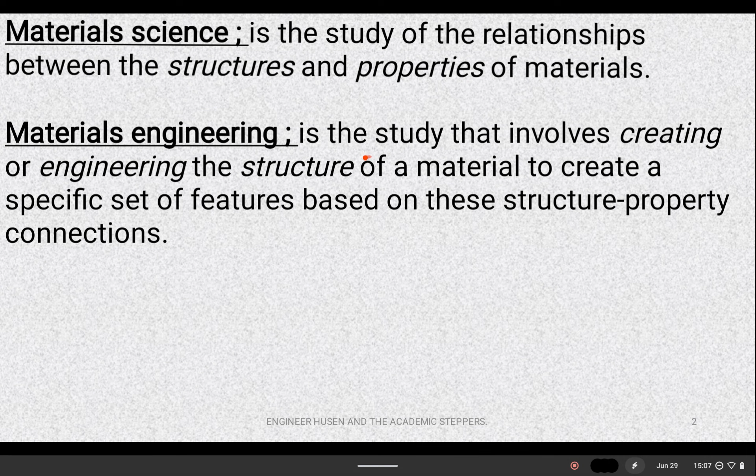Now we need to understand what material science is. Material science is simply the study of the relationship between the structures and properties of materials. With this in mind, we then have to understand what material engineering talks about. Material engineering is simply the study that involves creating or engineering the structure of a material to create a specific set of features that will be based on these structure-property connections that we have.

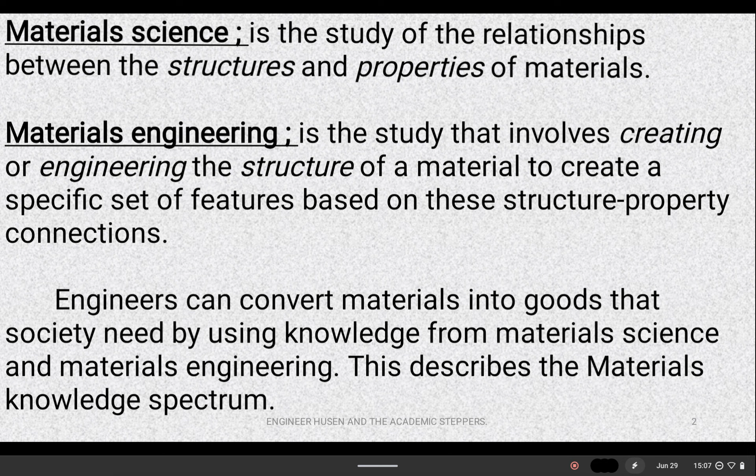So let's not forget that. As engineers, we can convert materials into goods that society needs by using the knowledge from material science and material engineering. This describes the material knowledge spectrum. In simplicity, all we're trying to say is that material science is simply the knowledge about the structure and property of a material.

Now that we acquire the knowledge, we're supposed to apply it in our day-to-day lives through engineering. That's where we have to create structures or materials that will meet the needs of society. Let's not forget that. So that is what material science and engineering looks at.

One thing you should know is this: when it comes to structures, a structure in materials is defined as the arrangement of the internal components of a material. So the way the internal components are arranged in a material is simply what is known as structures, and structures are of types. The first type is known as macroscopic structures, and these have structural features that can be seen with our naked eyes.

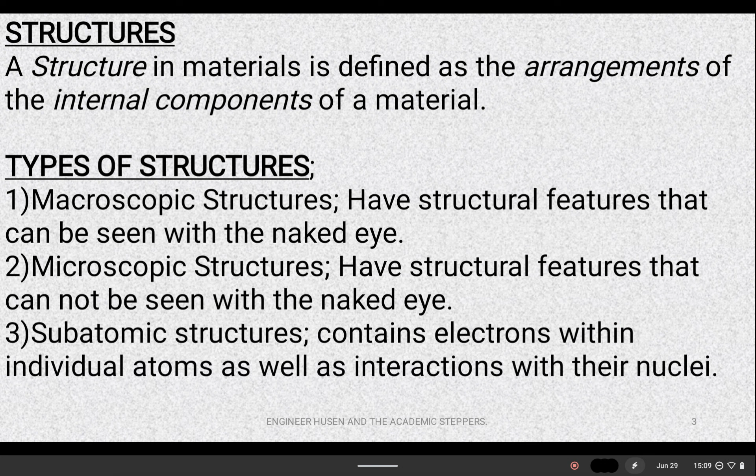Then after that, we also have what is known as microscopic structures - now, microscopic structures are these structural features that cannot be seen with our naked eyes. And the last type of structures that we have in material science is the subatomic structures. Subatomic structures contain electrons within individual atoms as well as interactions with their nuclei. So let's not forget that.

Now, with this said, we need to look at what property is. All materials are subjected to some external stimuli that leads them to react in some way, and this defines the material's property. For instance, a specimen can be subjected to some stresses that will make it deform, and you'll find that a polished metal surface will reflect light. So in terms of the nature and strength of the reaction to a particular imposed stimulus, a property is a material's behavior or response to that particular stimuli.

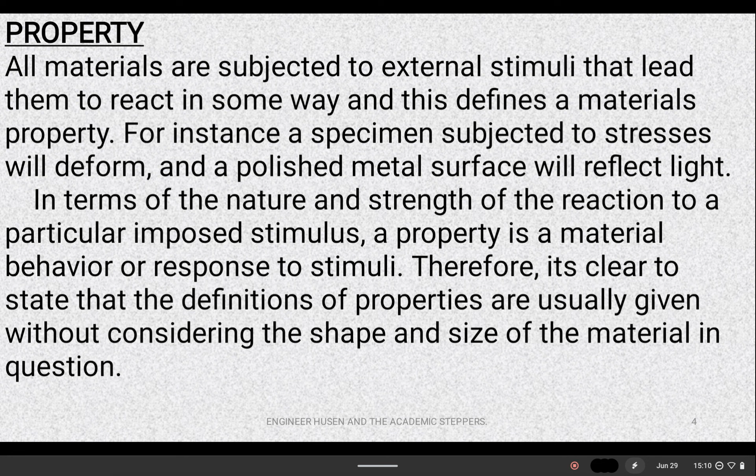Remember, stimuli are just factors that will cause a response. Therefore, it's clear for us to say that the definition of properties are usually given without considering the shape and size of the material in question. With what has been discussed, it's best to look at how we can group solid material properties. Solid materials will exhibit different types of properties, so let's try and group these.

The first property we can look at is the mechanical property. The mechanical property characterizes the solid material's ability to show what would happen if an applied load was subjected to it. So characteristics of a solid material that explain how it behaves when subjected to some external forces or stresses will describe the mechanical property that we're trying to highlight. Among the most frequent mechanical properties we have, we can look at the following.

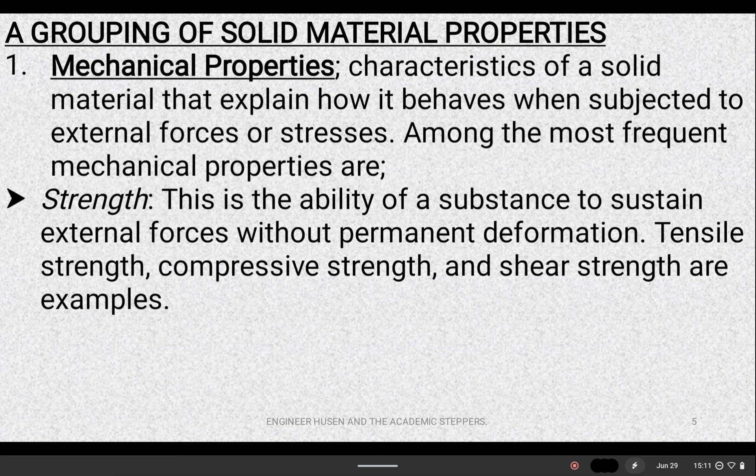The first one is strength. Strength is defined to be the ability of a substance to sustain external forces without permanent deformation. Tensile strength, compressive strength, and shear strength are examples.

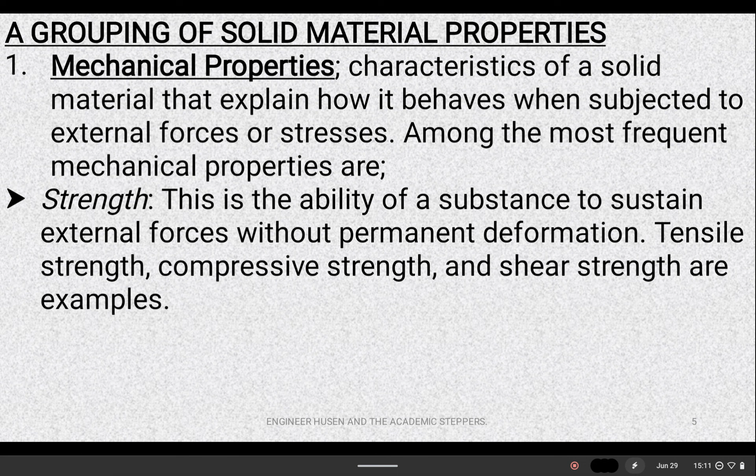Other than strength, we also have stiffness. Stiffness is the resistance of a material to deformation when subjected to an applied force. Let's not forget that. So the ability of a material to resist deformation is called stiffness, and in most cases you'd find this represented as K.

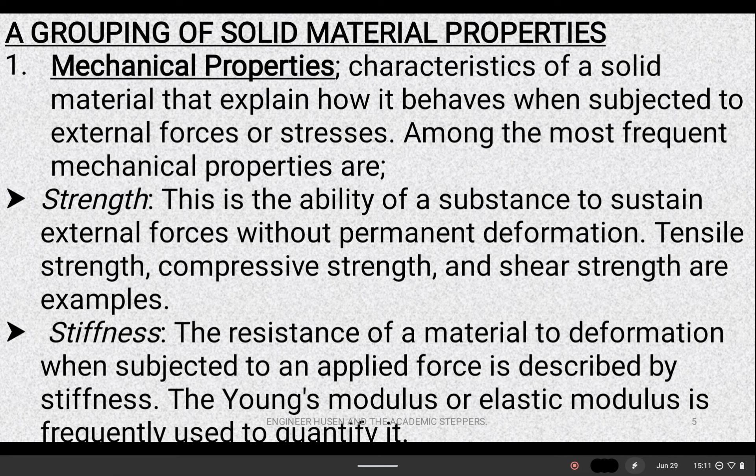The Young modulus or elastic modulus is frequently used to quantify stiffness. Other than stiffness, we also have hardness, which is a material's ability to withstand surface indentation or penetration. It indicates how resistant a material is to wear or scratches. If I try to scratch a material, is it going to be scratched due to the applied force, or not? The measure of resistance to wear or scratching is what is known as hardness.

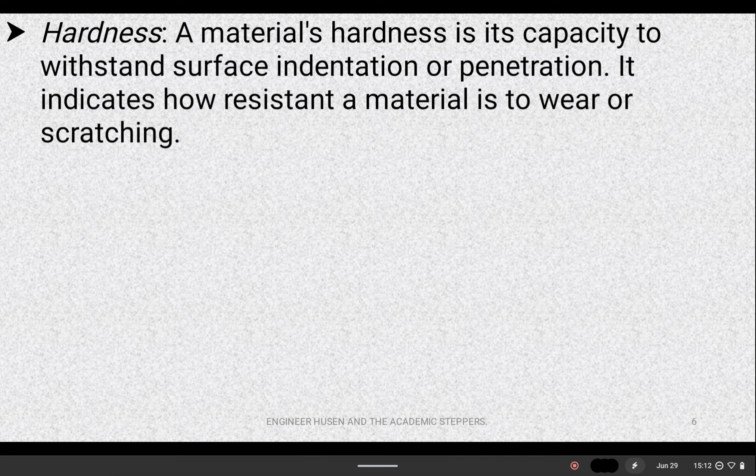Other than hardness, we also have ductility, which is simply the ability of a material to deform under tensile stress without fracture. It describes how far a material may be stretched or pulled into a wire-like shape. That's why when using the term ductility, you're looking at how a material can be drawn into something that looks like a fine wire.

We also have brittleness. All these are mechanical properties. Brittleness is just the exact opposite of ductility. When stressed, brittle materials tend to fracture. Fracture simply means to break without significant deformation. So brittleness describes the ability of a material, or the measure at which a material will simply just break. It's literally the exact opposite of ductility.

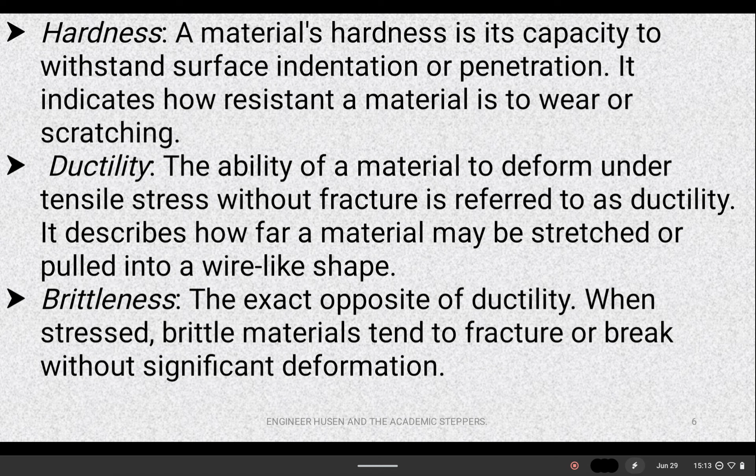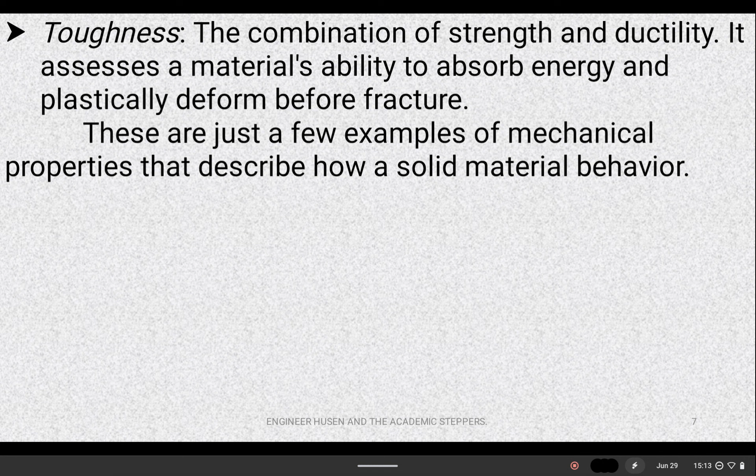Now that we have discussed those, we can also look at toughness. Toughness is simply a combination of strength and ductility. It assesses a material's ability to absorb some form of energy and plastically deform before fracture. These are just a few examples of mechanical properties that describe how a solid material behaves. We also have what are known as electrical properties.

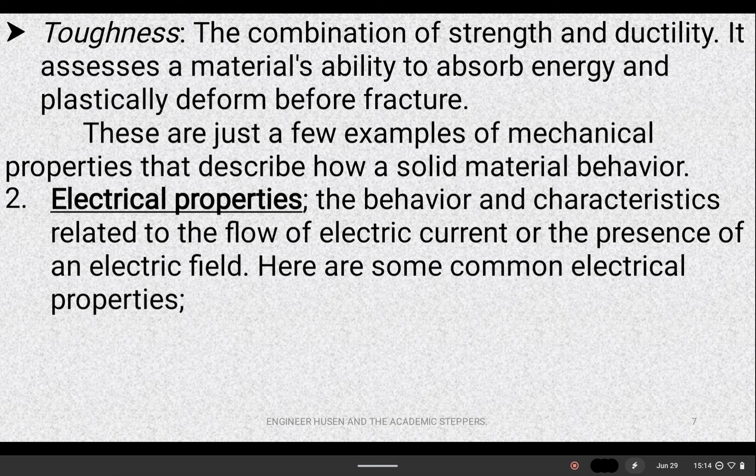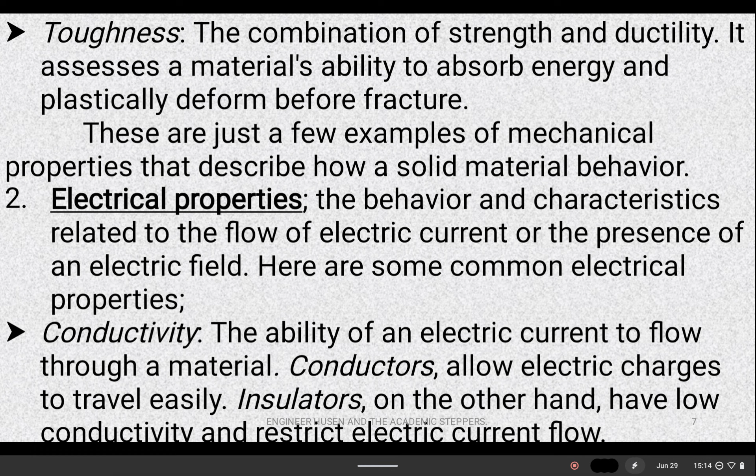Electrical properties show the behavior or characteristics related to the flow of electric current or the presence of an electric field. Let's look at some common electrical properties. We have conductivity, the ability of an electric current to flow through a material. Certain classes of conductors allow electric charge to travel easily, but the opposite of conductors are known as insulators or dielectrics, which have low conductivity and restrict electric current flow.

Other than conductivity, we have resistivity, which is quite the opposite of conductivity. Resistivity quantifies a material's resistance to the flow of electric current. We also have the dielectric constant, also known as relative permittivity, a measure of a material's ability to store electrical energy in an electric field. When exposed to an electric field, it determines how well a material can polarize or store charge. Then there's dielectric strength, the highest electric field a material can withstand before electrical breakdown occurs. It's a measure of the material's capacity to withstand high voltage without failing.

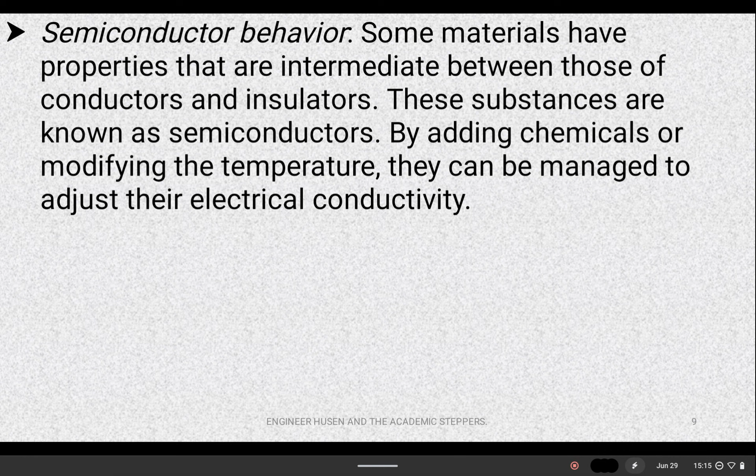Other than that, we also have semiconductor behavior. Some materials have properties intermediate between those of conductors and insulators. These substances are known as semiconductors. By adding chemicals or modifying the temperature, they can be managed to adjust their electric conductivity.

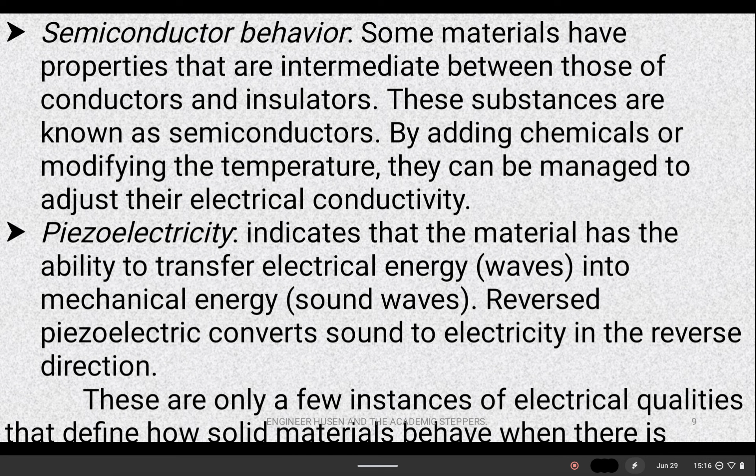Then we can look at the last one, which is piezoelectricity. This indicates that the material has the ability to transfer electric energy or waves into mechanical energy, like sound energy. Reversed piezoelectric converts sound to electricity in the reverse direction. These are only a few instances of electric qualities that define how solid materials behave, and there is actually a vast majority of others.

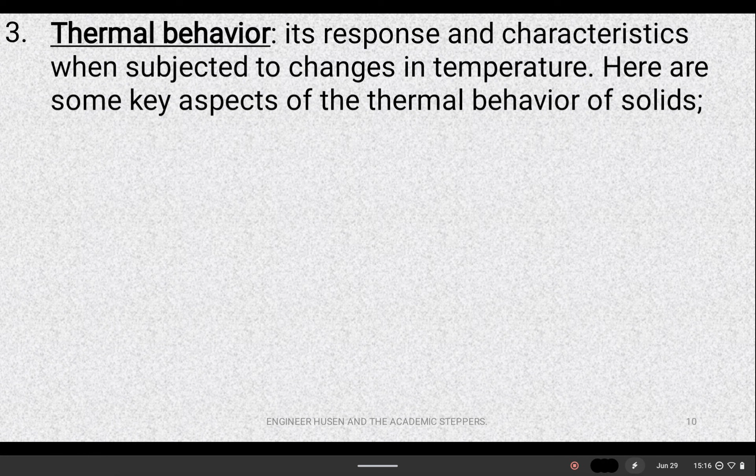Now what I want us to look at is the thermal behavior. Thermal behavior is just a response or characteristic when subjected to changes in temperature—how a material behaves when subjected to heat or temperature. Here are some key aspects of thermal behavior of solids. We have thermal conductivity.

Thermal conductivity is an example of a thermal behavior. It is a measure of how well a material conducts heat, measuring a material's capacity to transfer thermal energy via conduction. Metals have high thermal conductivity and are good at transporting heat. On the other hand, insulators have low thermal conductivity and are good at blocking heat flow.

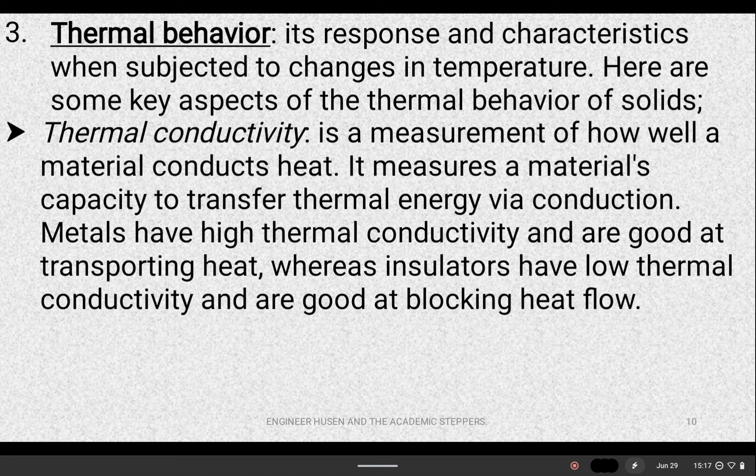Other than that, we can also look at thermal expansion. This refers to a material's tendency to expand or shrink in response to changes in temperature when heated. Most materials will always expand and contract. The coefficient of thermal expansion determines the magnitude, the size of dimension change that occurs as a result of temperature change. We'll be looking at these properties in detail, including how best to calculate this coefficient of thermal expansion.

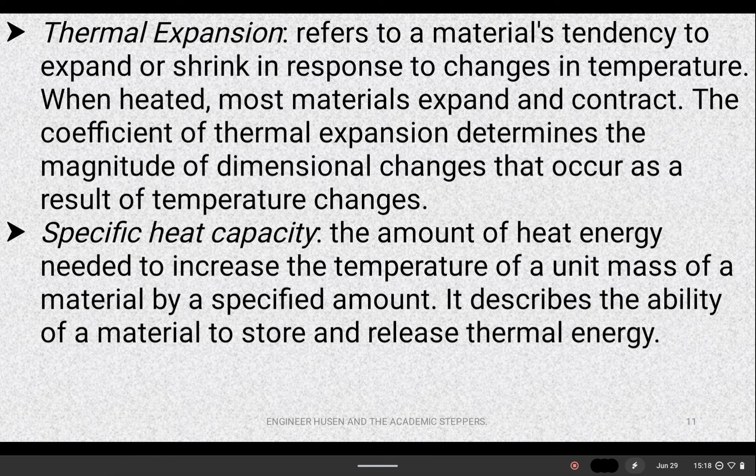We also have specific heat capacity. This is the amount of heat energy needed to increase the temperature of a unit mass of a material by a specified amount. It describes the ability of a material to store and release thermal energy.

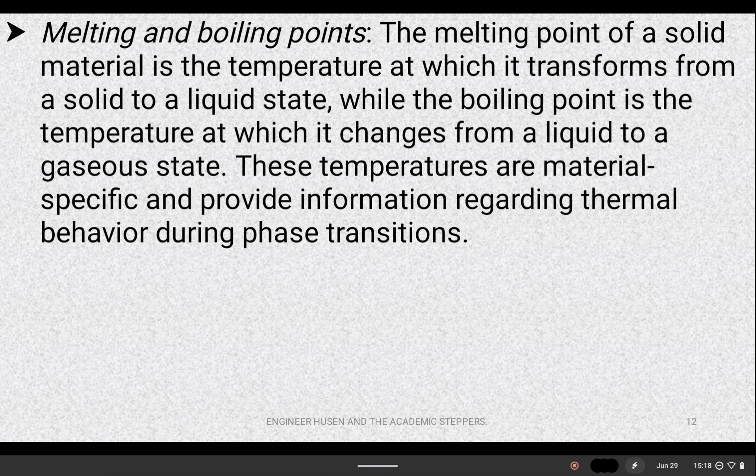With that said, we can look at melting and boiling points. The melting point of a solid material is the temperature at which it transforms from a solid to a liquid state, while the boiling point is the temperature at which it changes from a liquid to a gaseous state. These temperatures are material specific and provide information regarding thermal behavior during phase transitions. When we talk about phase transition, we're just talking about changes of state.

Then we also have thermal stability. Thermal stability refers to a material's capacity to resist high temperature without decomposing or changing structurally. It indicates the highest temperature at which a material may be used safely without degrading.

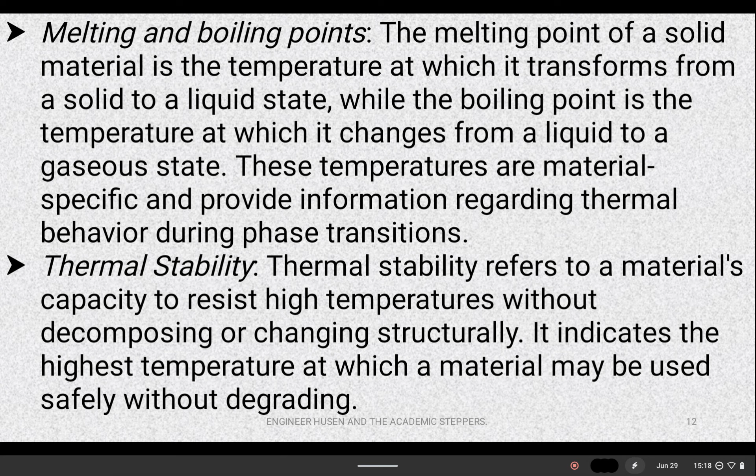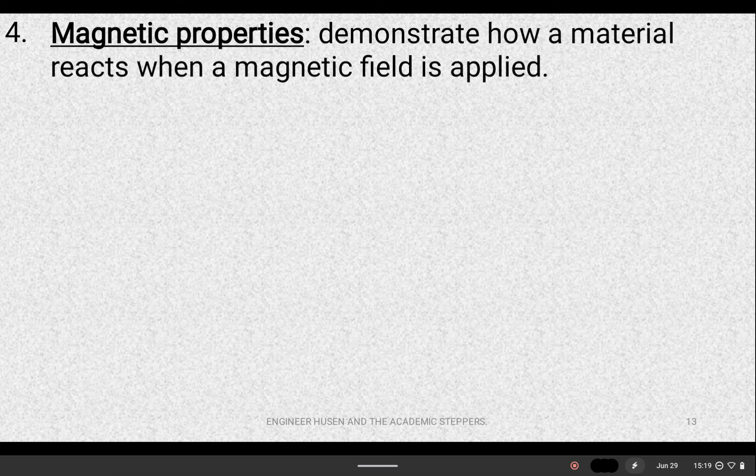Now, the next property we can look at are magnetic properties. These demonstrate how a material reacts when a magnetic field is applied. An example is magnetization, the ability of a substance to become magnetized or display magnetic behavior when exposed to an external magnetic field. Materials are classed as paramagnetic, which are weakly attracted to a magnetic field; diamagnetic, which are weakly repelled by a magnetic field; or ferromagnetic, which are strongly attracted and capable of retaining magnetism even when the external field is removed. There are several types of magnetic properties under magnetization that we'll look at in detail.

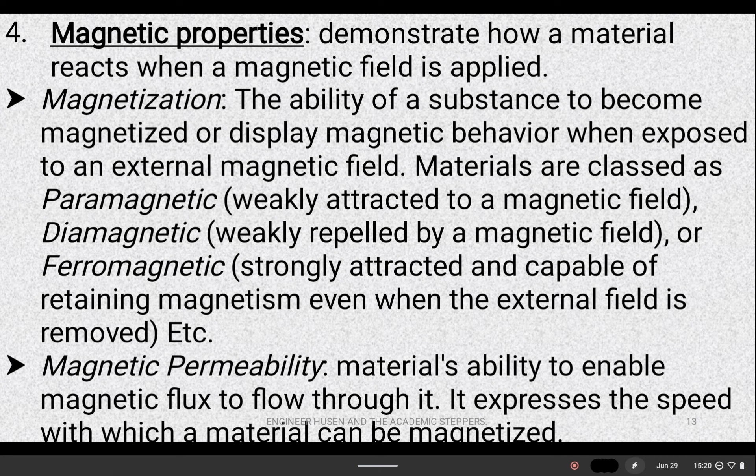We also have magnetic permeability, a material's ability to enable magnetic flux to flow through it. It expresses the speed with which a material can be magnetized. Then we also have magnetic susceptibility, the degree of magnetization that a material can undergo when exposed to a magnetic field, which describes the material's response to a magnetic field.

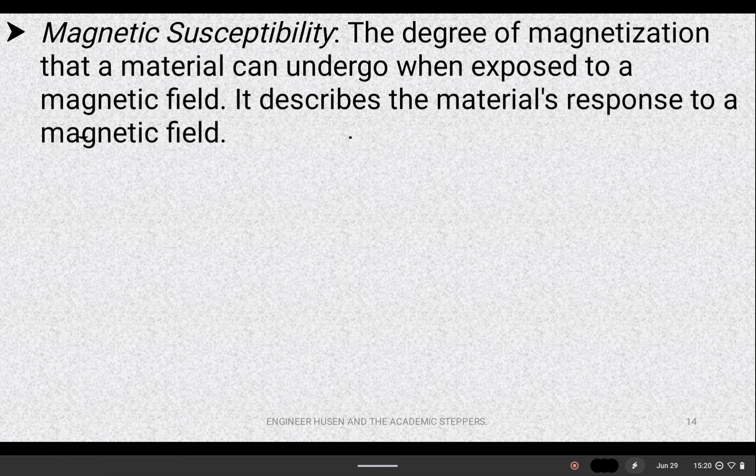Then we also have the Curie temperature. This is the temperature at which a ferromagnetic or ferrimagnetic substance loses its permanent magnetic characteristics. The substance becomes paramagnetic above this temperature. I'll explain this in detail when we look at magnetic properties in detail.

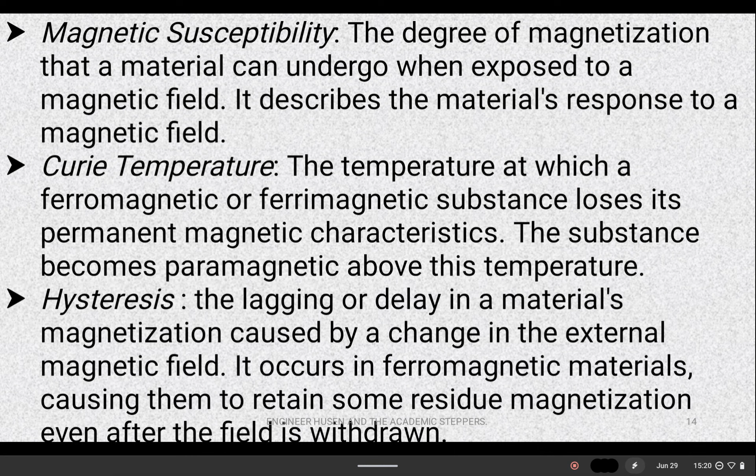We also have what is known as hysteresis. This is the lagging or delay in a material's magnetization caused by a change in the external magnetic field. It occurs in ferromagnetic materials in most cases, causing them to retain some residual magnetization even after the field is withdrawn.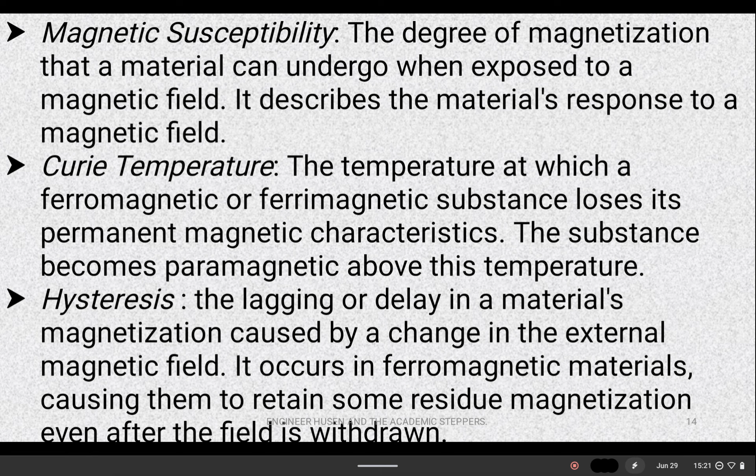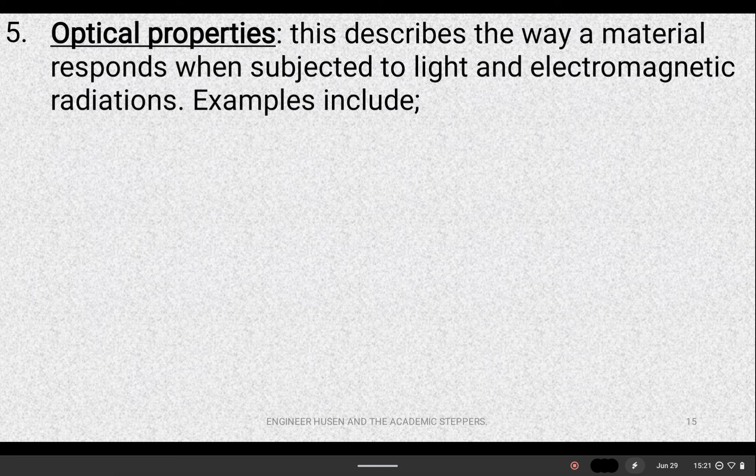The next property we can look at are optical properties. This describes the way a material responds when subjected to light or electromagnetic radiation, including properties like opacity or transparency.

Transparency, a term we use in our day-to-day life quite often, refers to a material's capacity to transmit light without significant absorption or scattering, enabling a clear view of objects through it. Contrary to that, opacity, when we say opaque, describes a substance's capacity to obstruct light, making it challenging or impossible to see through it.

The next one that we have is absorption, which describes a procedure through which photons or light particles, as we mostly like to prefer, are absorbed by the substance.

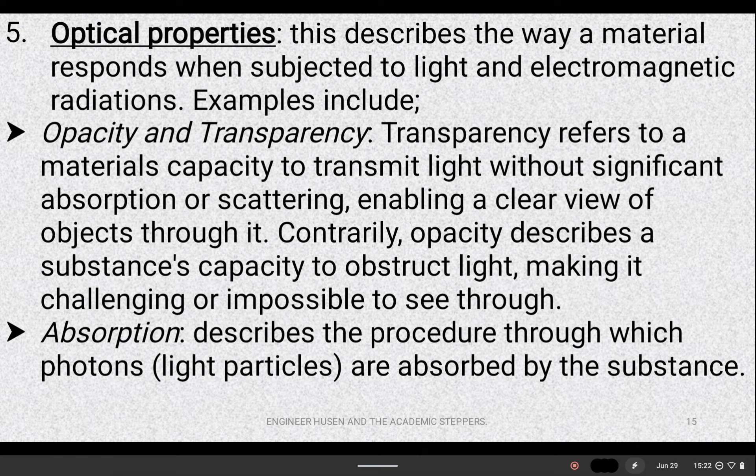Then we can also look at reflection. Reflection is the bouncing back of light rays from a material's surface. The direction and intensity of reflected light depends on factors like the angle of incidence and the surface property of the material. Then we have refraction, which is simply the bending of light as it passes from one medium to another with different optical properties.

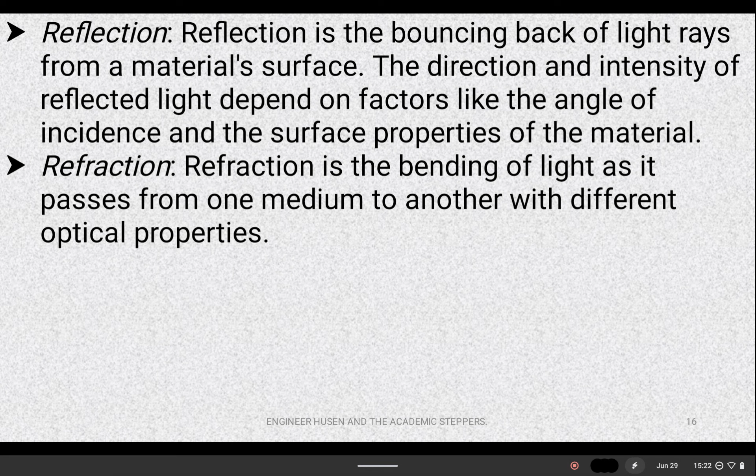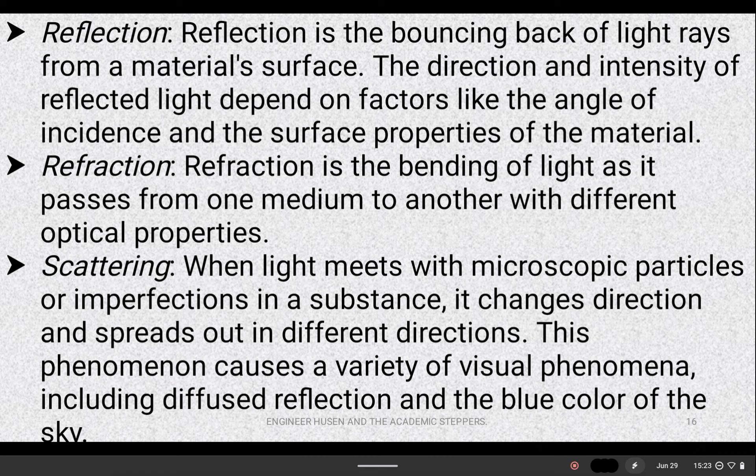Then we also have scattering. This is when light meets with microscopic particles or imperfections in a substance. It changes direction and spreads out in different directions. This phenomenon causes a variety of visual effects, including diffused reflection and the blue color of the sky. We'll look at scattering and other terminologies that are quite vast in optical properties, and we'll get to understand exactly how this works.

Then we also have what is known as luminescence. When it comes to luminescence, we're talking about the emission of light by a material after it absorbs energy from an external source. This occurs in different forms such as fluorescence, which are short-lived emissions, or phosphorescence, which are long-lived emissions.

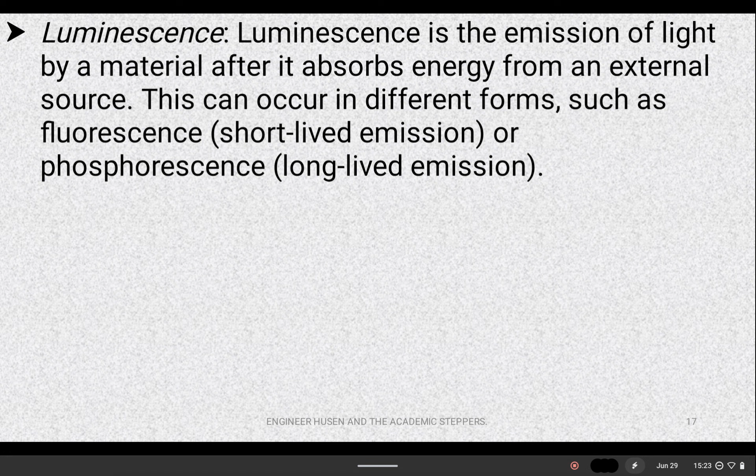Now we also have what are known as deteriorative properties. This shows the behavior of a material when subjected to reactions with its environment, especially with oxygen. It talks about how a material will react when it's subjected to an environment - is it going to corrode, or in what way is it going to deteriorate?

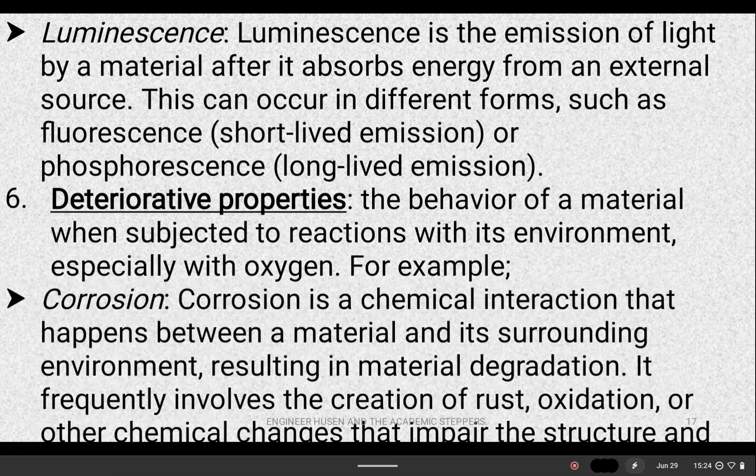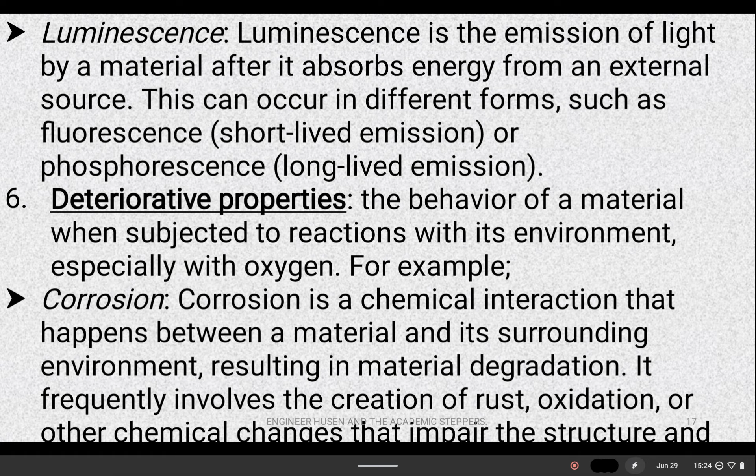For example, we can look at corrosion. Corrosion is a chemical interaction that happens between a material and its surrounding environment, resulting in a material's degradation. We'll get to understand corrosion better when we look at it in detail. So these are the 6 properties that we have of solid materials, and that's how they are grouped and classified. All those properties are going to be explained one at a time in detail. For now, we're just looking at the surface of those properties.

Now let us look at 2 terms that are mostly used in material science and engineering, which are processing and performance. Processing deals with the manufacturing and shaping of a material, that's if we want to achieve a desired form. But performance focuses on assessing how well the material performs and how well it can meet specific demands or expectations in its use.

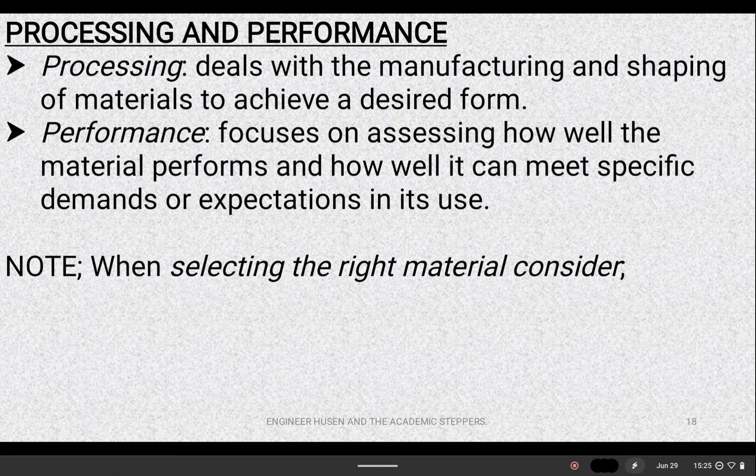Now you need to take note of something. Every time you're trying to select the right material, you have to consider 3 factors. This is a very important note that you have to know. When selecting the right material, you're supposed to consider the following: the first is the in-service properties, which is the strength or the ductility - in short, the mechanical property of the material.

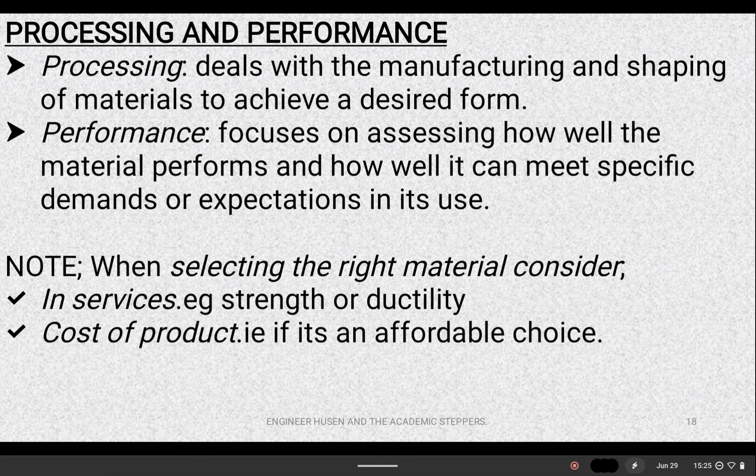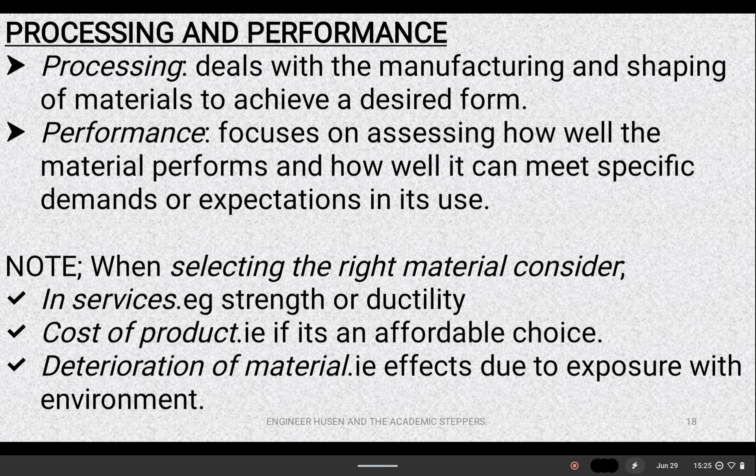Then the next thing you're supposed to check is the cost of the product - is it an affordable choice? Then lastly, we're going to consider the deterioration of a material. In other words, we're talking about the effects that it will have due to exposure to the environment. Now with this said, we can now jump into the 4 disciplines of material science and engineering.

There are 4 disciplines that we have, and this is the PSPP. The information you get from a material is all described in the PSPP: processing, structure, property, and performance. This highlights everything you need to know about the disciplines of material science and engineering.

So for today, we'll just end here. In our next video, we'll look at the types of materials that we have under material science and engineering.